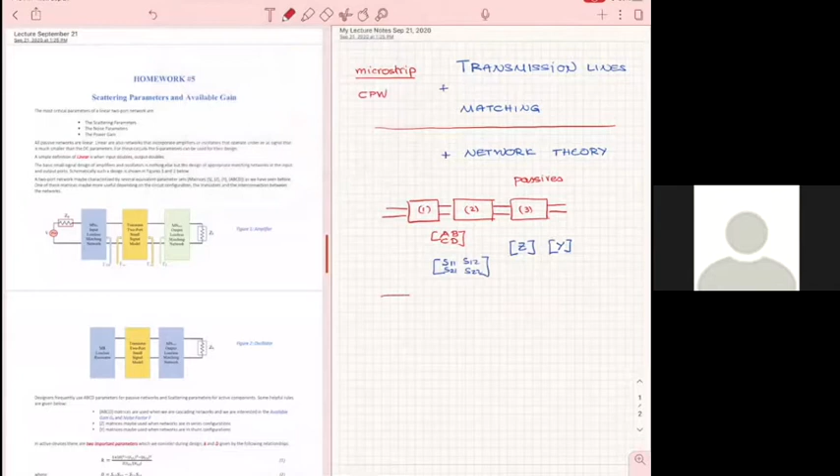Now, after that, that was important to introduce, we went back after we introduced network theory, and then we tried to talk a little bit about resonators again. And resonators, RLC, is a good thing to review. Why? Because anything you do using sections of lines or using inductors and capacitors eventually will resonate.

Sometimes you don't want to have a capacitor in a circuit, but the capacitor presents itself because of parasitics. And so we did the resonator so we understand what happens when a circuit resonates.

We started with RLC, and as we go down, you will see that any matching network will resonate, and will have the best performance at the design frequency where you want to be. But somehow later, at some point, at resonance, that system is going to change its performance substantially.

When you have an LC, the most fundamental resonator, what happens at resonance? If below resonance it looks like a C, above resonance it's going to look like an L. If below resonance it looks like an L, above resonance it's going to look like a C. So you have to stay away from these resonant frequencies to have a true representation of capacitances or inductances wherever you want to have them. Otherwise, if you hit the resonance of any of those, then practically your matching network has been destroyed.

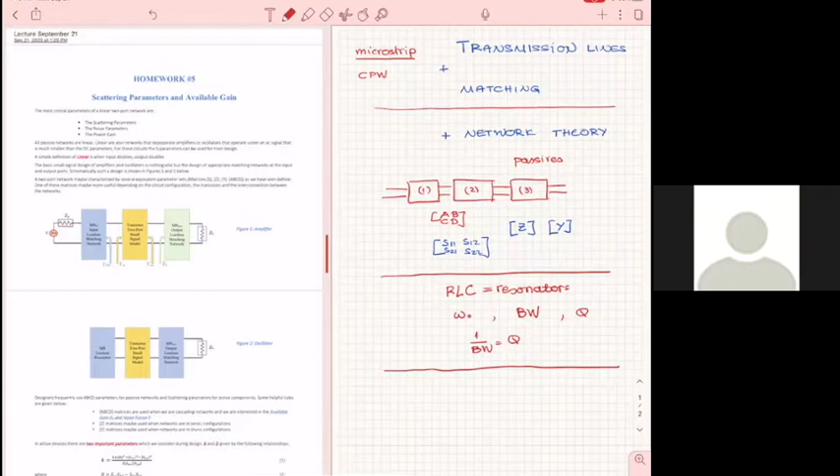Now that we have the network theory in place, remember the resonators, we introduced bandwidth and Q. We have the transmission lines and the matching circuits. Now we have enough in our toolbox to start thinking about something of higher complexity, always thinking about components in our receiver.

And that's why it was important to introduce the receiver concepts early, so you have a sense of why we are looking at filters, as we will do next. Why are we looking at amplifiers? Why are we looking at mixers? If we did not have an introduction to those systems, then I will go from one to another, and you will have no understanding of why those three are so important.

So of course, filters, amplifiers, mixers. Now, these are fundamental. Without any of the three, you will not be able to do a receiver.

Now, are those three the only ones that are required? Of course not. You will have local oscillators as a second level, but I will assume that the local oscillator can be any other generator. Of course, you're going to have the matching networks, which are embedded up here.

So how are you going to connect one to the other? Through matching networks. And then, of course, as I said, you have the LO, which we are not going to cover in this class, you will have the analog to digital converters, you're going to have digital to analog converters, you may have couplers, you may have all kinds of different things, which we are not going to cover in this class.

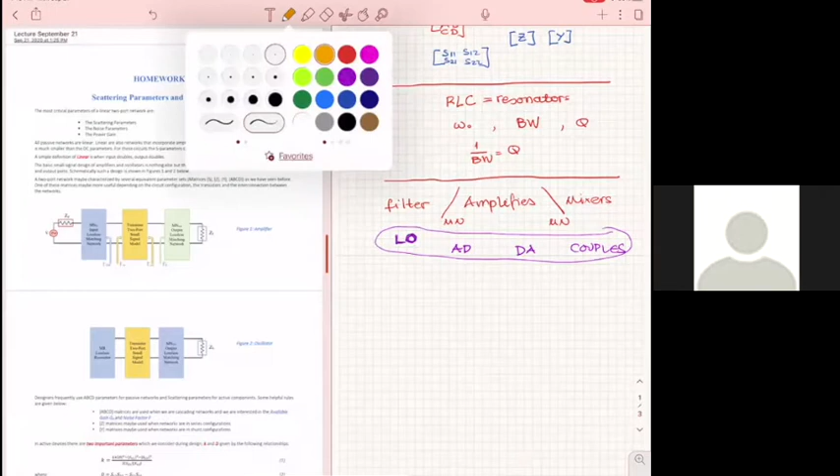And passives, usually when people talk about passives in circuit design, what they mean first of all is resistors, inductors, capacitors, number one. And then at the higher level, of course, matching networks.

Now, what we've seen, even through our homework, is that both inductors and capacitors are not like the LCs of the low frequency applications that we've seen there as fixed components. The passives in high frequencies, because they are made out of three-dimensional geometries, have resonances.

So both resistors, we did not do the resistors, we'll find a way to do them later as an example. Both resistors, inductors, and capacitors, as you have seen, have a lot of parasitics. So you create an inductor, but the parasitics introduce capacitance. You create a capacitor, but the parasitics introduce more capacitances and inductances. So eventually, all of these passives resonate.

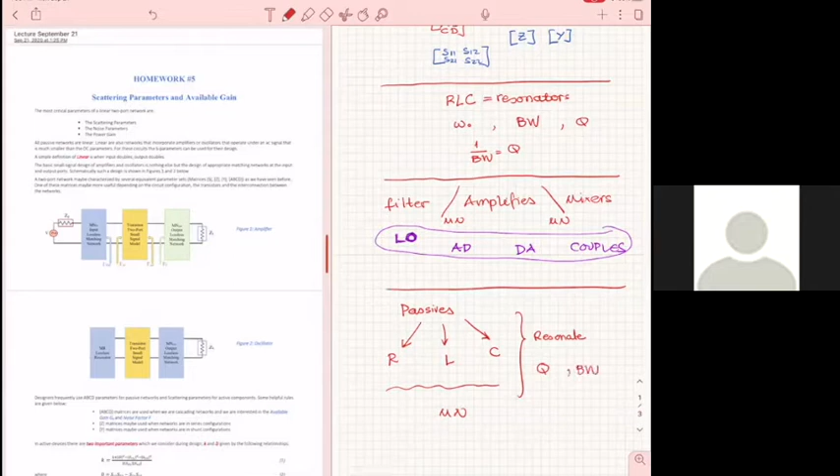That's why it is important to understand the Q and the bandwidth. Why is that important to know both? Because if you have a system made of components, your matching networks or other passives that you need will be part of those, and any Q and bandwidth here in a cascade will impact the Q and the bandwidth of the whole system.

So if you start designing without having an understanding of the importance of those, then your system, if you design them individually and put them together, the system is not going to work.

So as we do everything in a high frequency amplifier, first of all, there are no lumped elements the way we understand them in low frequencies. Everything is distributed because we make them using traditional fabrication methods. The resistors are distributed, the inductors, the capacitors, the higher the frequency you go, the more distributed they are. Everything is distributed, everything resonates, everything has a Q and a bandwidth.

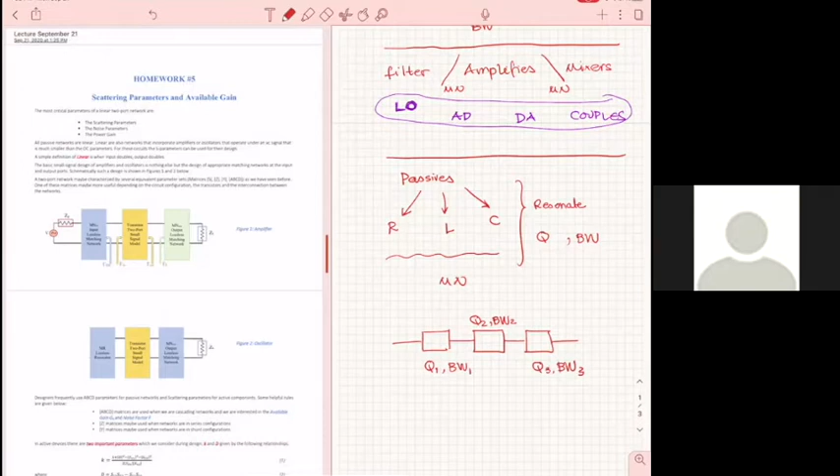And so you cannot talk about a receiver without understanding the fundamentals. Now all of this may seem to you like throwing rocks here and there in a totally random way, but it's not random. That's what I'm talking about: the system brings the pieces together.

Now with that, I would like to go to a homework that I will give you, that I have uploaded, but I will solve a similar problem, yet different, today. So before I start that, do you have any questions?

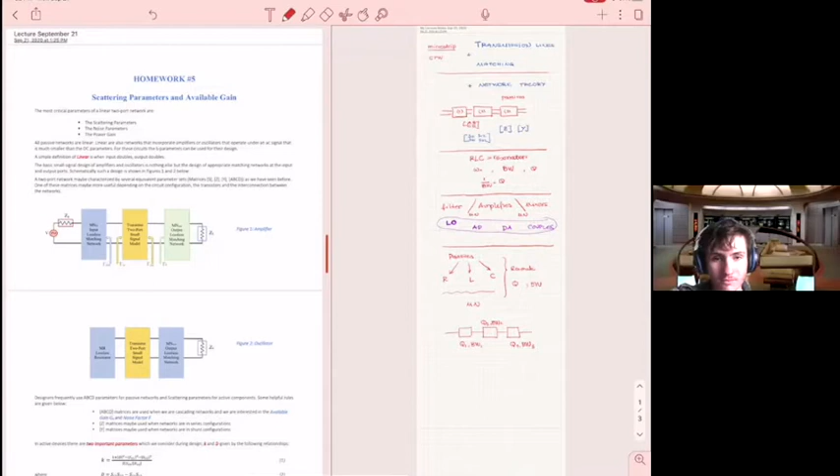Can you hear me, first of all? Yes, ma'am. Okay, because last time we had some problems. Okay, so now let's do the homework, or similar to the homework, I should say.

Okay, what you see here is something we are going to cover in detail later, but here I will give you a recipe. Still, even if it's a recipe and we have not developed that recipe, a designer is not going to just take somebody else's recipe. A designer is going to create his or her own recipe.

However, for us here, the recipe is good. And then later on we're going to go and learn how to do more complex amplifiers. But for now, we have, in fact, to create an amplifier out of a transistor chip.

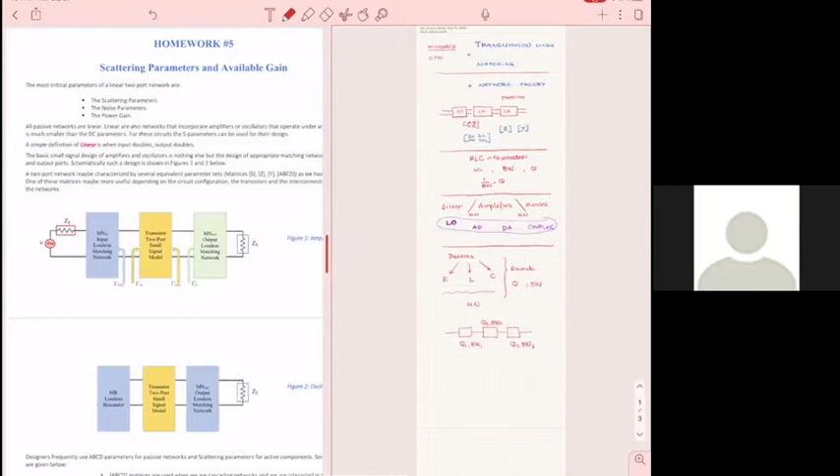Somebody gives you a transistor. You write to, say, Texas Instruments, they send you a transistor. Now this transistor is a chip, has all the characteristics as you will see later. You have all the parasitics in place, but how are you going to make that a low noise amplifier? That's the question. So the theory we are going to have says the following, look at figure 1.

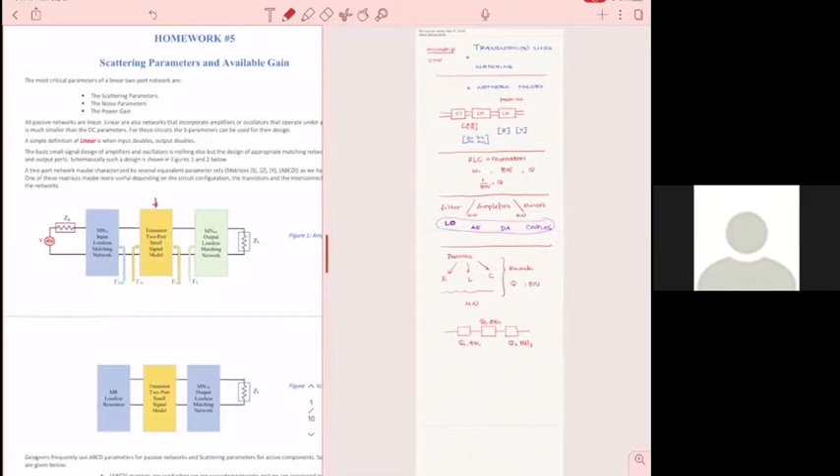To be able to do this out of a chip, this is your chip here, to be able to create an amplifier, low noise or high power, for now it's low noise the way we've done it, you will need to be able to match the amplifier on both sides. Otherwise, you're not going to get the gain you want, and you're not going to get the characteristics, stability, noise, and so forth that you want.

In this particular application, we're looking only at the gain, and we are using a recipe to do that.

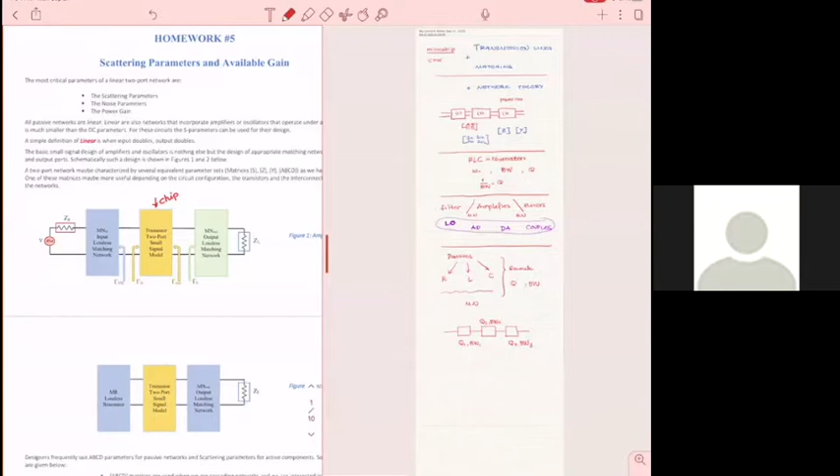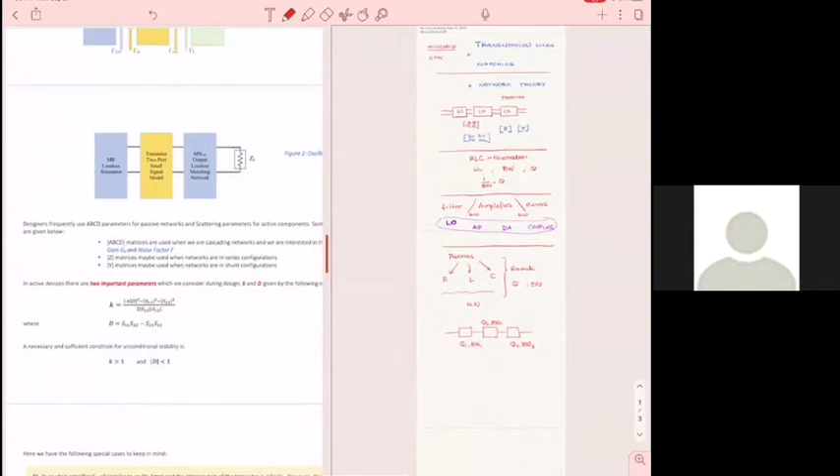Now, at this point you're going to appreciate why it is important to use the matrix terminology. Because people who develop passives, system designers, talk about passives in ABCD kind of language, because it's easy, provides the gain for them. But people who do active device characterization and who use active devices for amplifiers, they use scattering matrix terminology.

So, could we go back to the last diagram? Yes. This one. So, and then we will find out what will be in this particular case, for us to be able to design these matching networks, we'll assume that Z sub G equals Z sub L equals 50 ohms. Can you hear me? Yes, I can hear you. Yes, ma'am. Okay, okay, perfect.

And then you will assume that we are going to find gamma SM and gamma LM here. Now, if I find these two entities for you, these two complex parameters, and I ask you to design the two matching networks, will you be able to do that? Yeah, it's like identical to homework 1. You remember how we did homework 1?

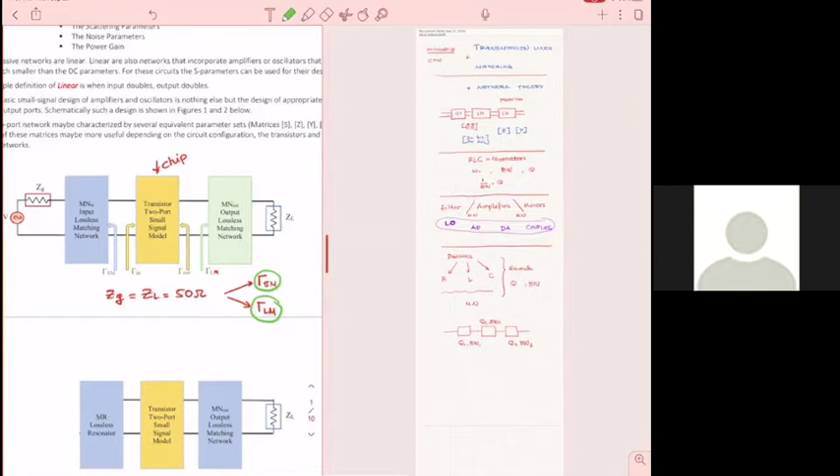So as I said before, multiple times, the only thing in creating this chip and low noise amplifier is to identify the two matching networks and to make them.

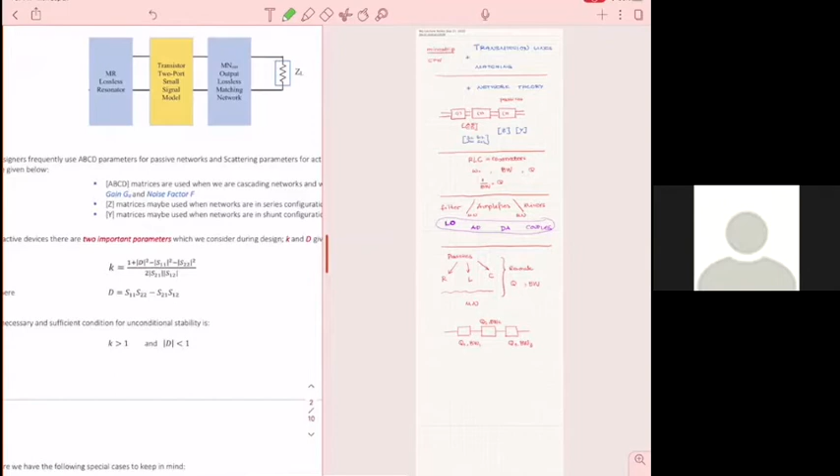Okay, what is the process to do that? First of all, active devices are given in scattering parameters. I will tell you the example that I have for this homework and the example that I will do today. The homework and the example are using different active devices.

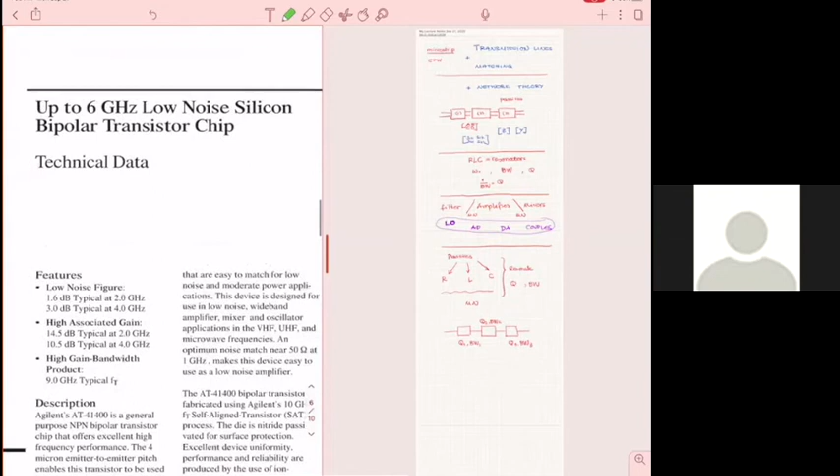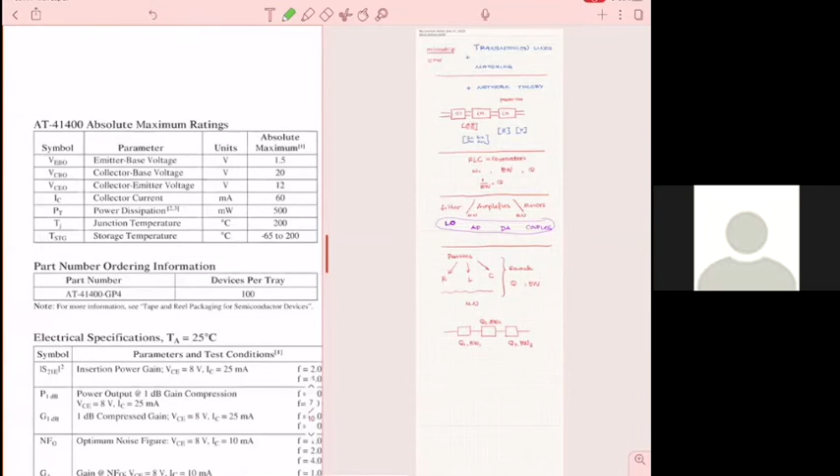For the homework, I found a bipolar transistor example that works up to 6 gigahertz, and that I got from Agilent. So here, I believe it's Agilent, yes.

So there are a lot of data, but I wanted to attract your attention to the following. Look how this chip is given to you. It has, of course, incorporated all of the chip package parasitics. So you don't have to worry about how the transistor itself has been put in its own package, because they are not given to you in an open environment—they're packaged for protection and other things.

They're given to you in terms of the scattering parameters, see? And usually, in this particular case, they will only have the scattering parameters, but you have the frequencies, and now you have here the bias conditions, all right?

Now you don't care, they just tell you—you're not gonna develop that for now. You just see the bias conditions. And then for different bias conditions, they give you different frequency ranges, or the same, depending.

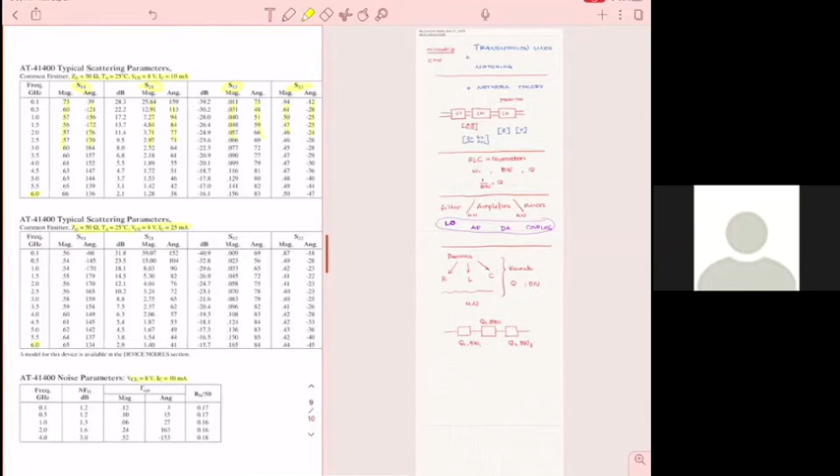Now, you then, on the basis of your operating frequency, will have to choose from these tables. You know more or less where your operating frequency is. You will have to figure out whether this device can work well. What are the first very early indications that you can easily develop your device?

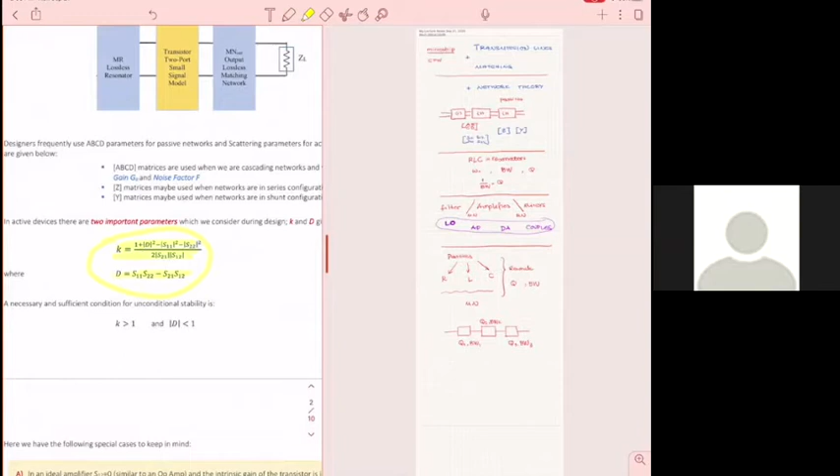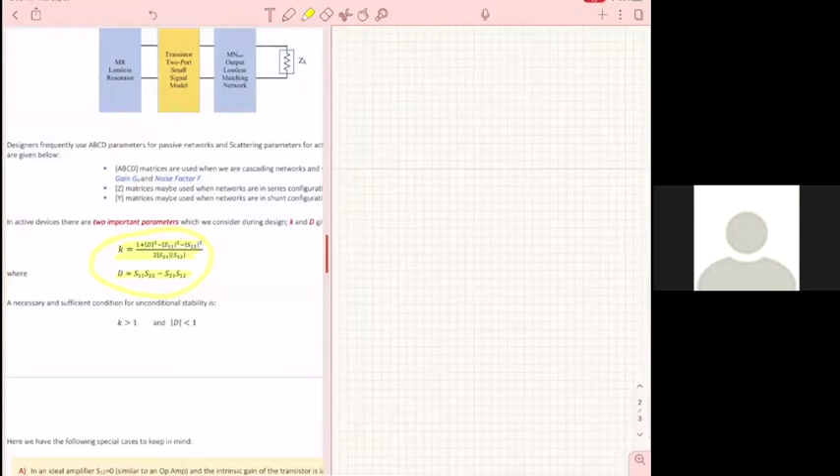There are these two parameters here: K and D. These two parameters are important because they help you understand how stable that particular transistor you will select, at that particular frequency, will be. So these two parameters are called the stability parameters, K and D.

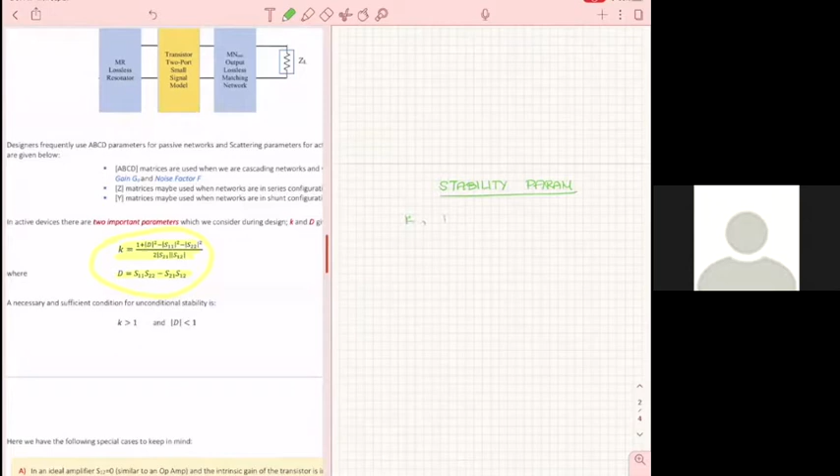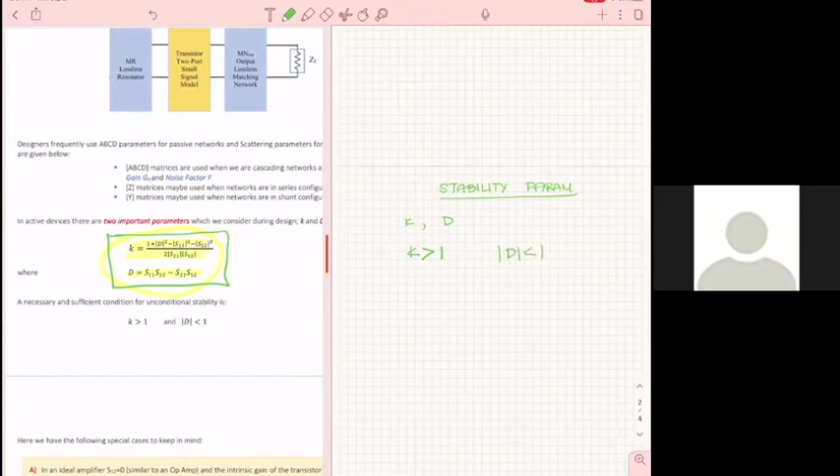The earliest test you have to do before you select your transistor and your frequency is to make sure, using these general formulas, that your K has to be above 1 and your magnitude of D below 1. And that will make your transistor unconditionally stable. You know what that means?

Probably not. It's always stable no matter what frequency, and matching—so it will be stable, it's not gonna start oscillating. That's good. Beyond that, if you are not careful with the matching, then an inappropriate matching is gonna lower your gain. That's what is gonna happen, all right?

But if you know that these two parameters apply and are in this range—one is above 1, and the magnitude of the other, D, is below 1—then you know you don't have a problem with oscillations. Now, of course, there are cases, which we will cover later, where your K is below 1, and then your transistor has to be matched carefully to be able to be stable. But you can match it, and in fact, if you want very high gain, or very high power, the best designs are transistors which are conditionally stable, all right?

We'll do that later. There are still ways to match a conditionally stable transistor to make it a good amplifier, especially for high power and high gain. However, if you want a low noise, decent gain amplifier, an unconditionally stable transistor is the best choice, all right?

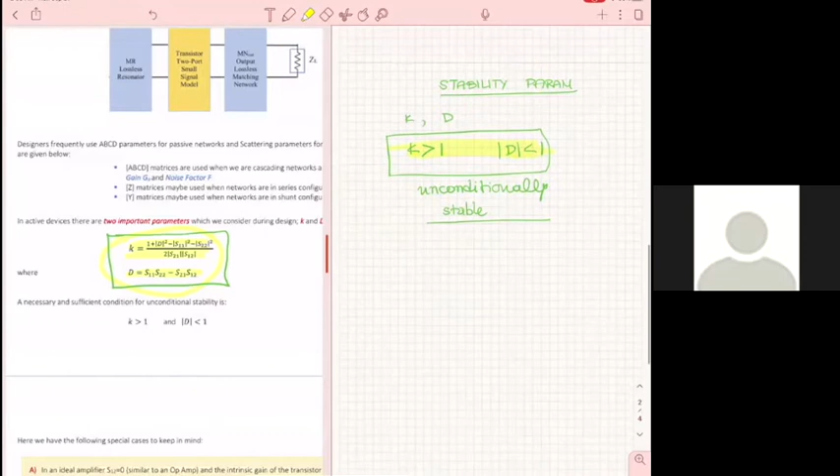So now that's where we are. Then, here is the recipe. The recipe tells you the following.

When you're ready, you can read the whole thing, it just prepares you for the recipe. But the recipe practically starts here. And that's the important piece.

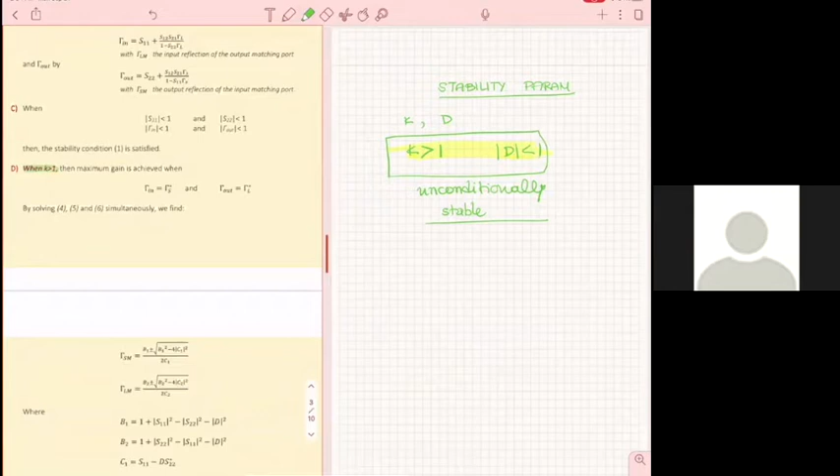Assuming that you have selected your transistor to have K above 1, usually the magnitude of D most of the time is less than 1. We don't worry, but I would always calculate it. Then the recipe tells you the following.

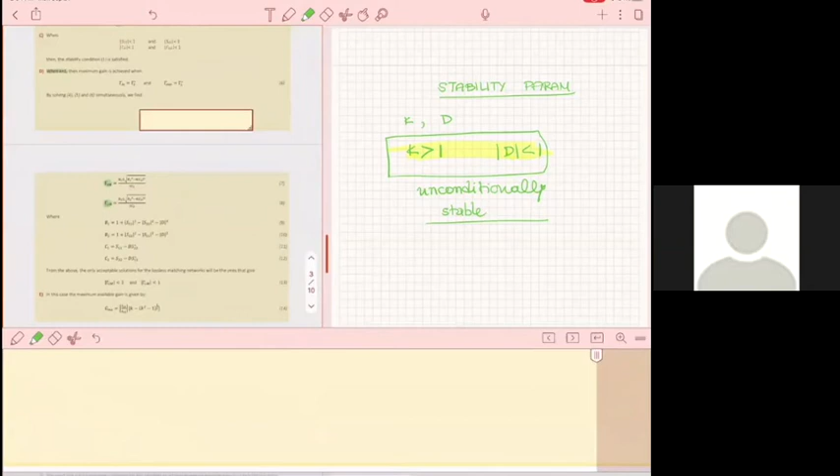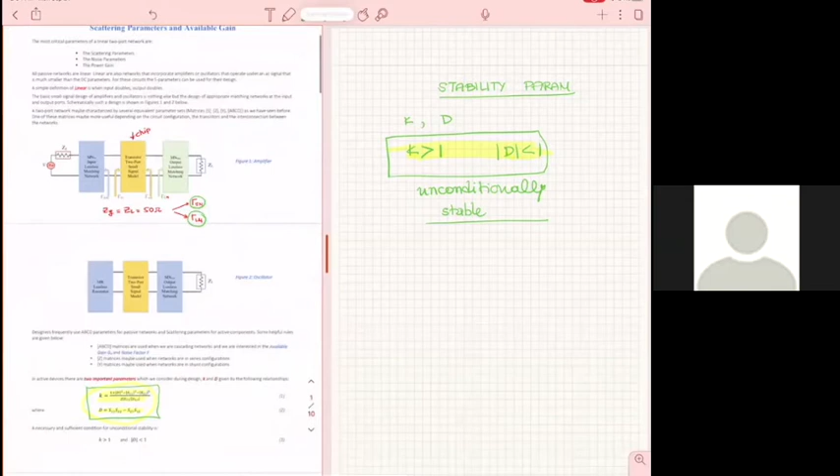If you design the two matching networks, your reflection coefficients, you remember that gamma SM that I showed you above, and the gamma LM, they are here. Gamma SM, gamma LM here. These two, if I find these two, then I have the matching networks. And these two are given by these formulas, all right?

So assuming your K is above 1, you calculate your D, and then you go upwards. You calculate your C1, C2, then your B1, B2, and then eventually you calculate this. And then when you do that, you have the two reflection coefficients, and from there you can find your matching networks. And then you know that this is going to give you the maximum available gain that you can get under low noise conditions.

And the maximum available gain, as a matter of fact, theoretically, it will have to satisfy this. And it will, if you do the matching networks correctly.

Any questions so far before I go to the example? Okay, I will assume that we don't have questions.

Sorry, real fast. You said that was for K greater than 1, right? Yes. Okay, thank you. Now, hold on, I haven't finished looking at the equation yet. Yes, okay.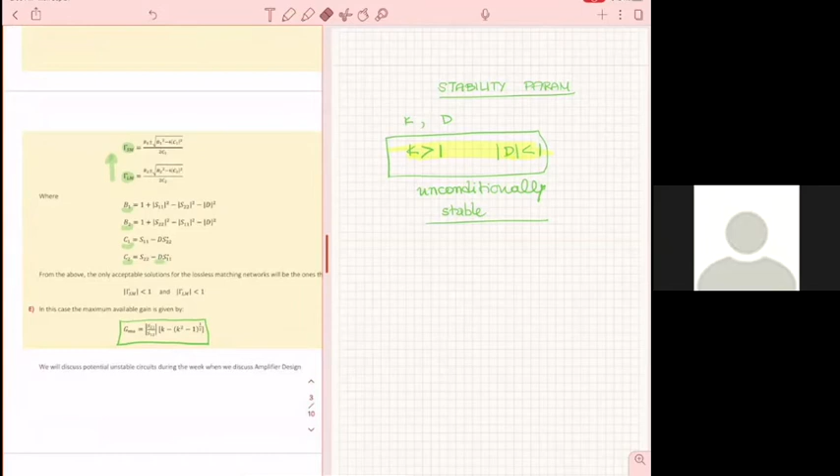Could you please zoom back? Those are also on eCampus. Had they been uploaded? Oh, that's homework 5. Yes, and this is also the theory that we are doing today. Okay, but this, all right? All right, yes, and I will, okay.

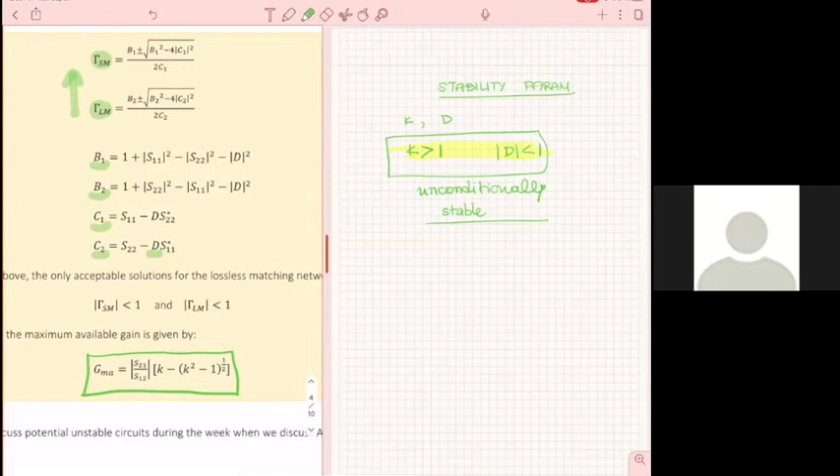You see why K has to be above 1? Because in here, there is a square root of K squared minus 1. And the available gain, of course, is in terms of power, so it's a real number. That's why K has to be above 1 to be able to do this unconditional matching.

If K is less than 1, you have to do a different approach to get the gammas. You cannot get the gamma SM and the gamma LM from these functions anymore. You have to go to the Smith chart and do some kind of trial and error, because on the Smith chart we're going to learn where the stability regions are for a potentially unstable transistor. We'll be able to draw the stable regions on the Smith chart, and we are going to find an operating point to have the transistor operate in those regions. That is what we're going to learn later, but not for now.

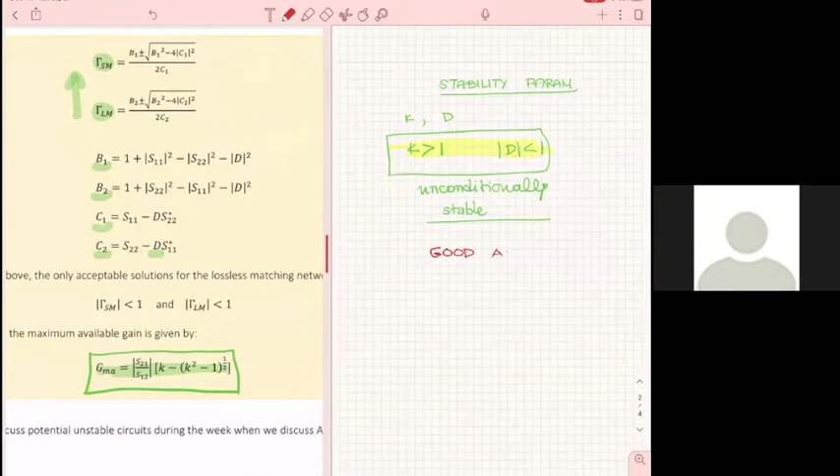This is for unconditionally stable transistors. And again, remember, this is a good approach for low noise, medium type of gain, which is in fact this G maximum available of an LNA practically, okay? This is a good approach to design an LNA. We're going to see those more, but now this is the recipe.

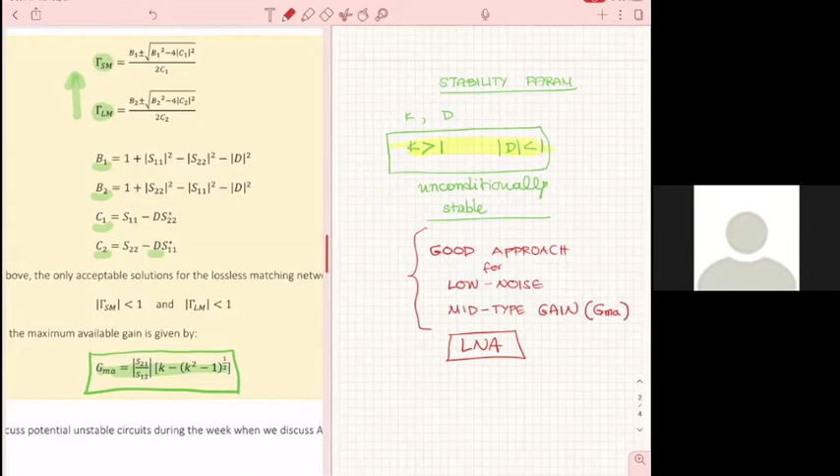I don't want you to know anything more about that, but the only thing we did from here is to find the two gammas. And from there, then you go to the design of the matching networks. Okay, so now I will do an example on the basis of that.

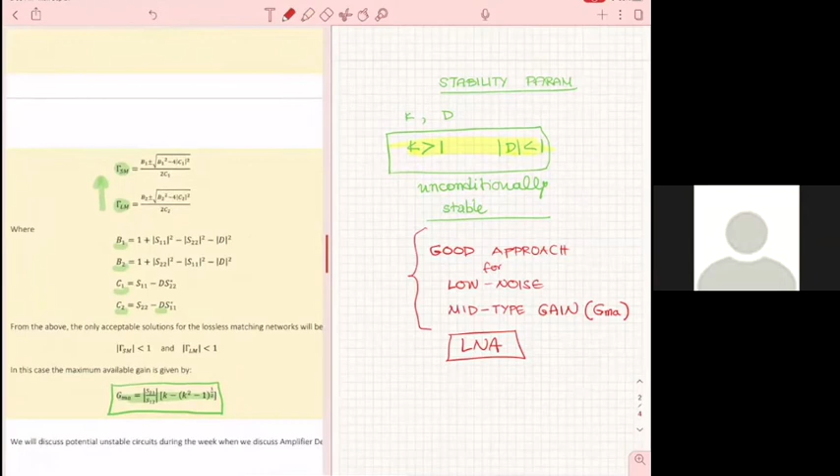Let me go back here, and I would like to show you this one. Okay, that's a different BJT. I selected that because I was able to, it's also a BJT, but it's given by NEC. It's a different one. And look at the interesting thing.

Very interesting. The transistor itself has been designed for, if you want to consider 1 gigahertz high frequency, but very low noise there. And because people will operate it around the lowest noise point, the FT is only 7 gigahertz.

You see that? You remember what we called FT? Who will tell me what FT is from what you remember from active devices? You have unity gain. Unity gain for the intrinsic device, all right? Without the package parasitics, remember that. There is another one which is called F max. What is F max?

Unity for power, but it depends on the load, correct? Exactly, and the parasitics, the package parasitics and the whole thing. Usually Fmax is lower than FT, as you can imagine. But people who are good designers try to make Fmax as close to FT as possible, though it's always lower. And yet you have to stay away from both of them.

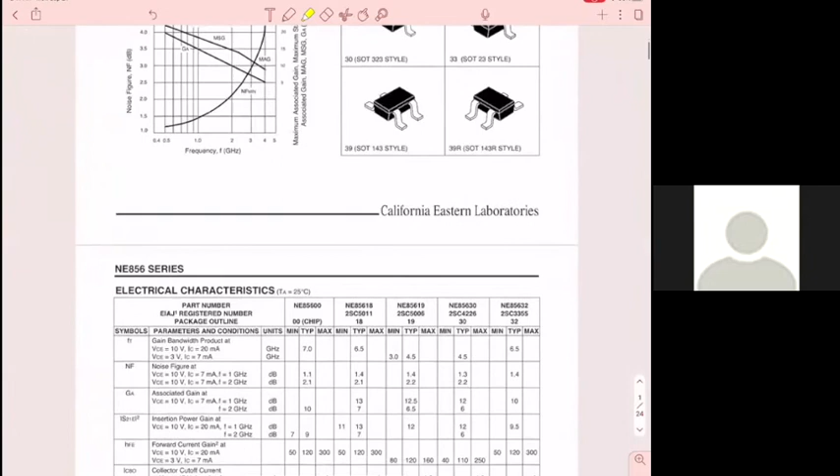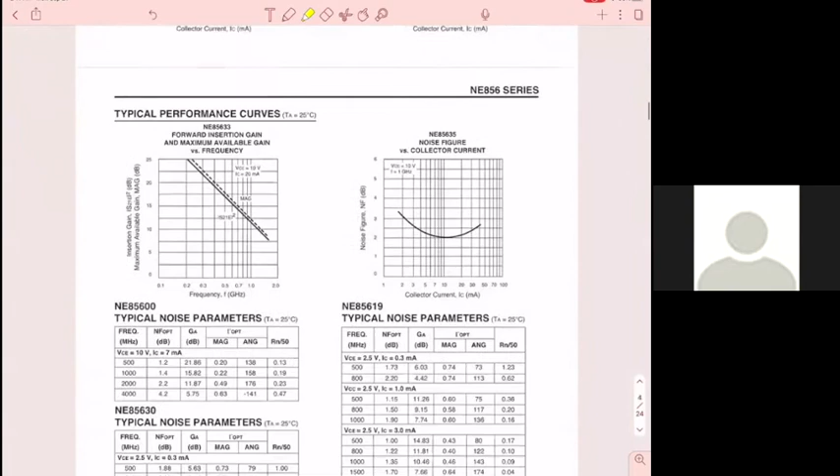In any case, this is what I found. I liked it because there are a lot of data sheets available from industry, and this one I liked. I skipped all of this and went directly to the scattering parameters. Here are my scattering parameters.

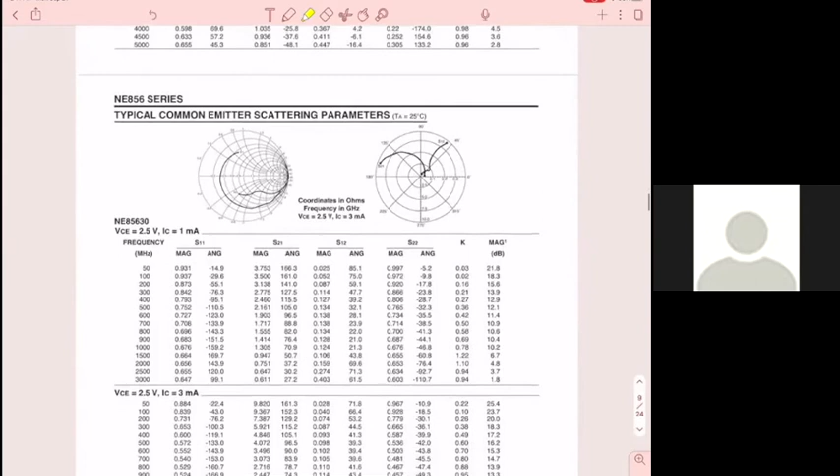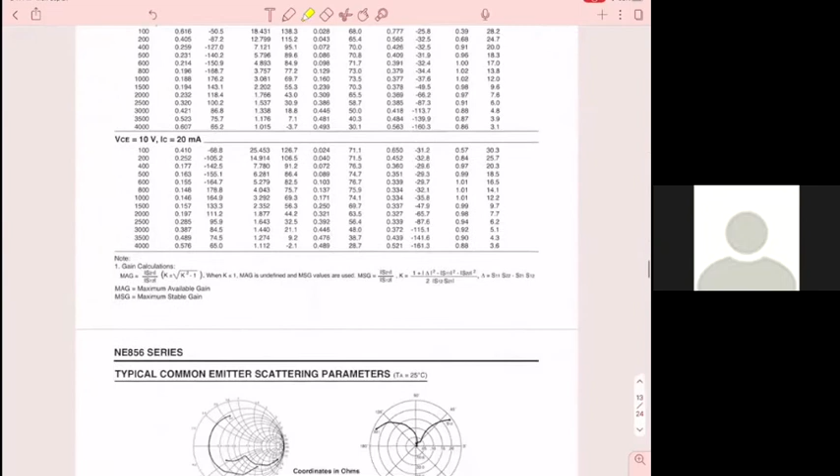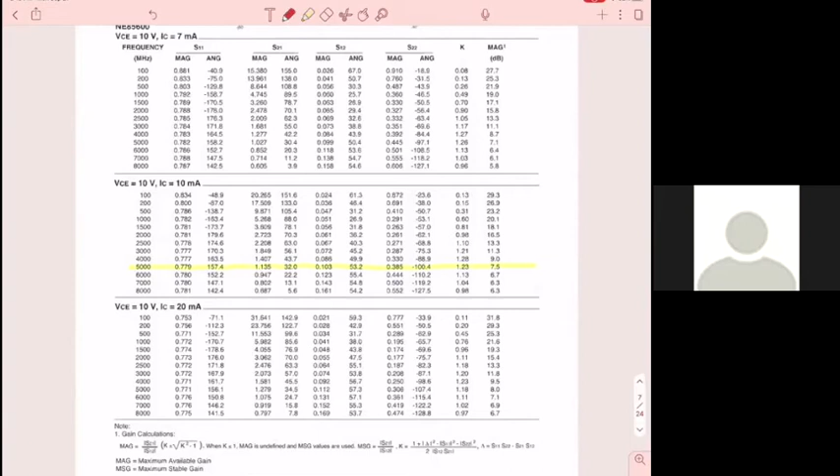Here, I'll show you which ones I selected. The interesting thing is, you can ask me why I selected that. I selected it at 5, close to my frequency - this particular one has a higher frequency design, close to 5 gigahertz. But look at what else I paid attention to: the nice thing is it has K also calculated, and has the maximum available gain calculated.

So if you do it correctly, I'm going to get this high of a K. K will be 1.23. And then I will have a nice maximum available gain of 7.5 dB, which is nice since I'll have relatively low noise. Now the noise is not calculated here, but you can calculate the noise - we will see how to calculate the noise later. All right, so I selected those.

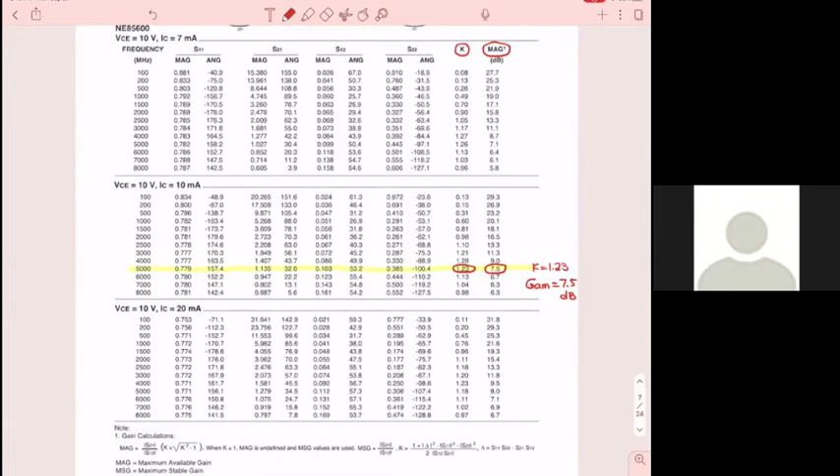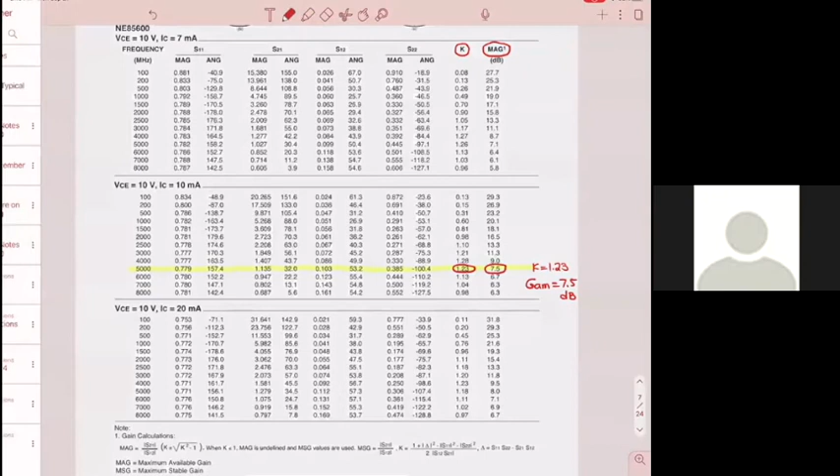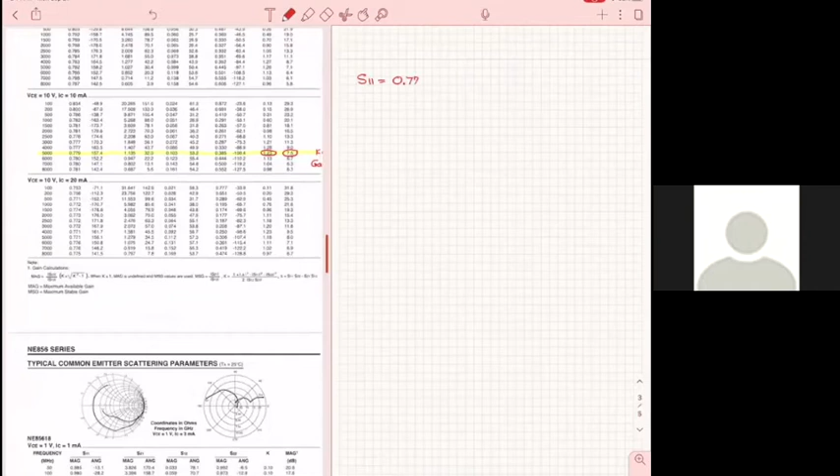So what do you do in a case like that? Let me get my lecture notes here on the right. So now I'm going here. What I did is I wrote down what I have. My S11 is practically 0.779, 157.4. My S21, see, is S21 first.

S21 is 1.135, and then it's 32. S12, which comes next, is point...

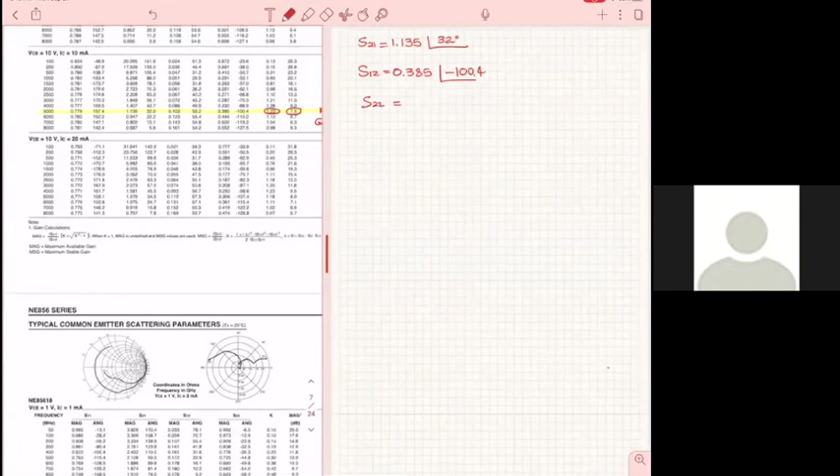Is this an unequal sign, not equal sign for S21? I'm sorry, it was like a thing that was generated from that. 0.385, minus 100.4, and then S22... Well, let me see, no, it's S11, S21, S12. Yeah, this is S22. Okay, S22, and then S12 is here.

103. 53.2. Okay, then...

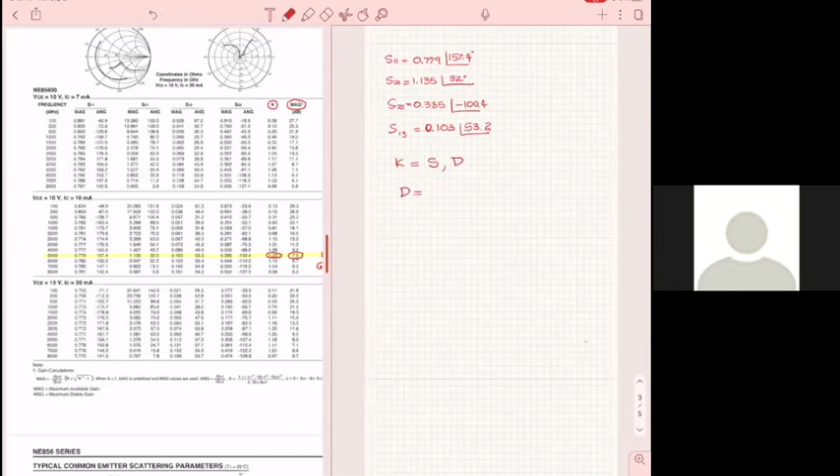What you do, what I would do myself, is confirm your K from the K formulas you have seen. K, according to the formula I showed you before, is a function of the S parameters plus D. So you have to calculate D, which is S11 S22 minus S12 S21. And then from there, go calculate, and that has to be less than 1. Then you have to confirm that your K, if available from the manufacturer, matches this value. K is 1.23, 1.23. Then after this, you calculate the formulas.

You calculate C1, which is practically plugging in the values for S11 minus D, S22 complex conjugate. In this particular case, I found my D to be 0.435. So D was 0.435 for me. I made some rounding to make those calculations easier. And then you find C1 and C2.

From C1 and C2, you go and calculate B1 and B2, and B1 and B2 are real numbers. So if I were to go back for a moment and look at this, all right? So what you're going to have is D, as you saw before - it's a complex number. C1 and C2 are complex numbers, but B1 and B2 are real numbers, as you can see.

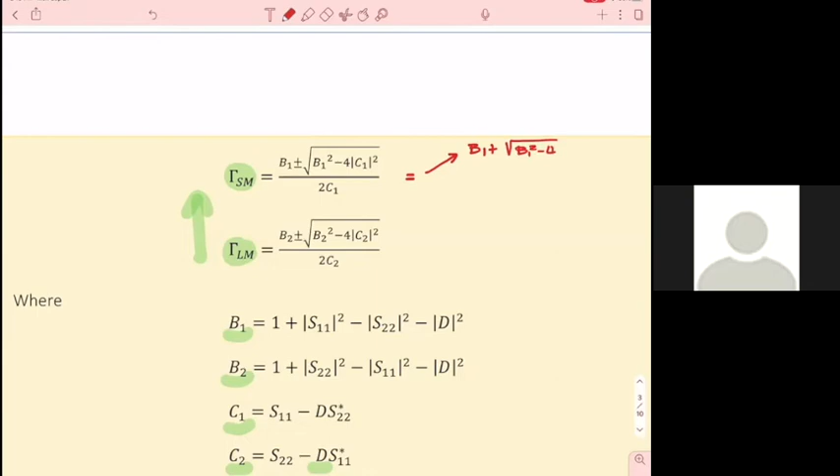And then from B1 and B2, you go into the expressions for gamma SM and gamma LM. And here you will see the following: the numerator is real and has two possible values, B1 plus or minus the square root of B1 squared minus 4 C1 squared, divided by 2 C1. So your gamma SM has a phase which is the negative of the phase of C1.

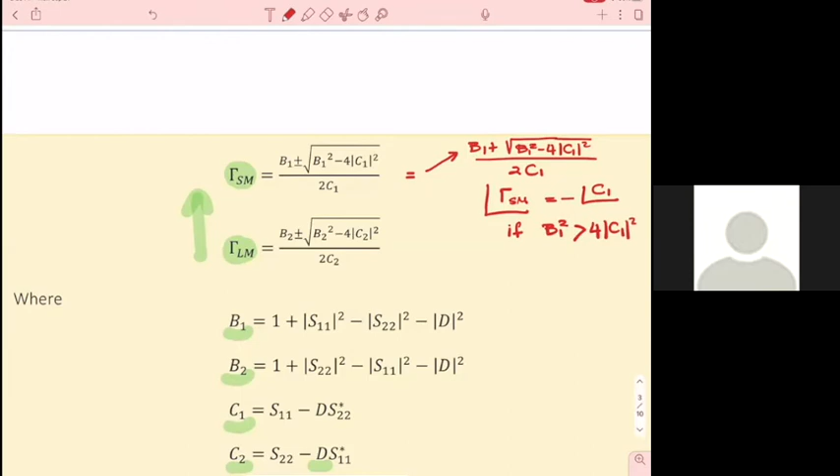Unless, that is true if B1 squared is larger than 4 C1 squared, okay? However, if B1 squared is less than 4 C1 squared, then your numerator becomes B1 plus J of this.

So there is also a complex number in the numerator. In this particular case below, your phase for gamma SM is going to be different than the phase of C1, because you're going to have a J in the numerator, and C1 is also a complex number.

Now, the other thing you have to pay attention to is that in addition to plus, I will have a minus. Practically the minus is going to give me, in the second case, a different result. And in the first case, it's going to give a different number in front, on top, if they're both real. But you are going to have two solutions.

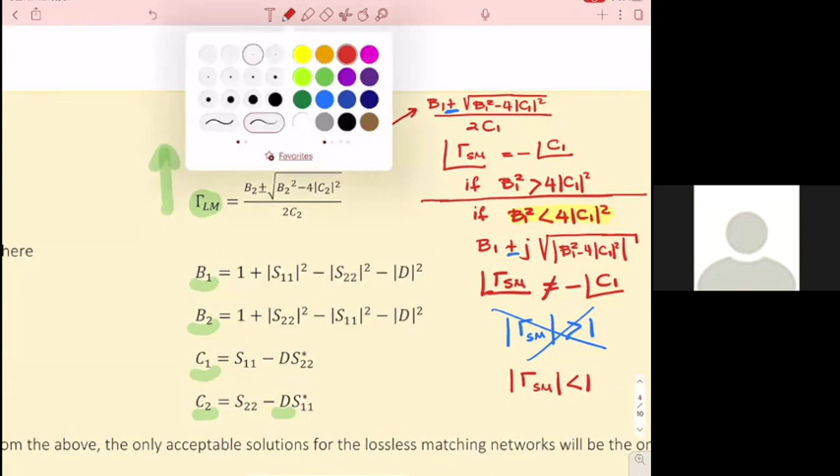So it's only the solutions from here that you're going to select - only the solutions that give gamma SM less than 1 and gamma LM less than 1. That's where you're going to stop after you calculate.

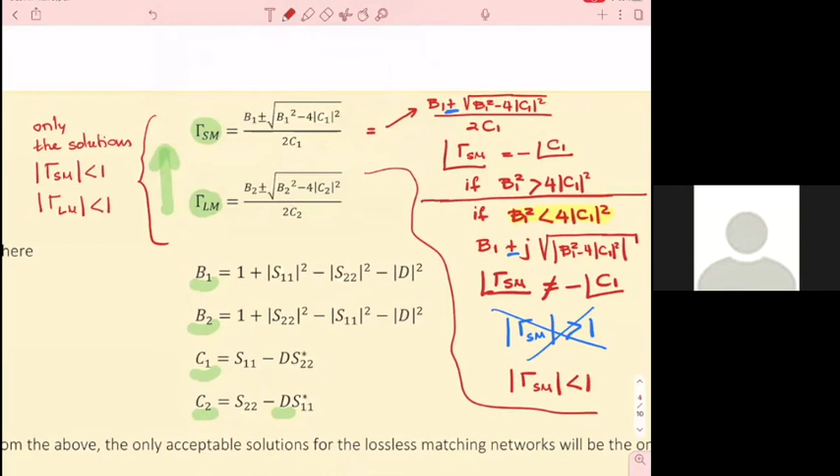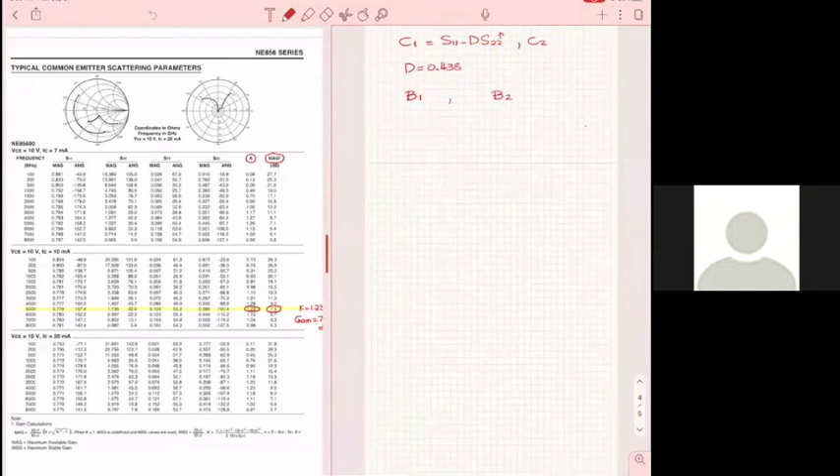Now let's go to my other notes. After you have calculated your gamma SM and your gamma LM in magnitude and phase, they're going to look like this: magnitude, which is going to be less than 1, e to the j phi SM, and magnitude e to the j phi LM. And of course, in your solutions, I will again remind you, this will have to be less than 1.

Now, it is true that all of your solutions could be less than 1, which means all of the solutions are possible. It's not always true that one of the magnitudes in one of those solutions is going to be higher than 1. But if it's higher, you dismiss it. If it's not higher, you keep all of them, and all of them will give you different matching networks that can do the job equally well in terms of matching the amplifier.

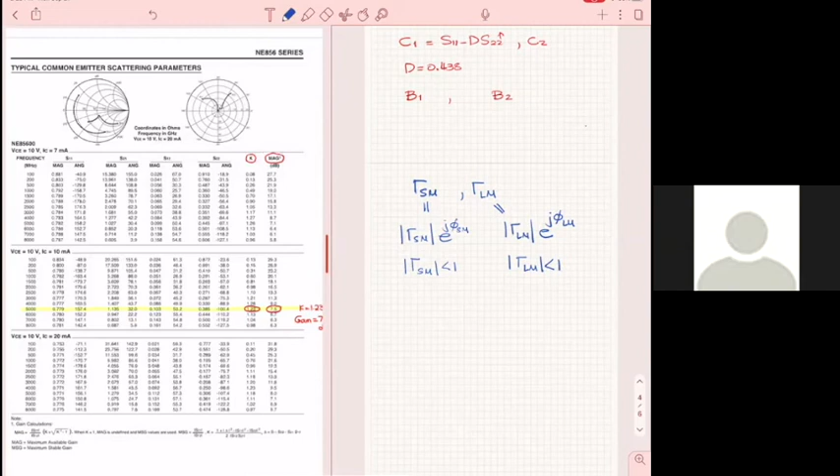Now, from all of those, some will be better than others when you start thinking about the Q, the resonant frequency, or the bandwidth of your matching network. Because so far, so good, you've done this. Now the next challenge is to find the matching networks.

In this homework, or for our projects - the projects are open-ended, so I'm not going to tell you where to stop. In the homework, obviously, I'm not interested in you going for every solution you find. Just pick one of your gammas and try to realize that. I don't want you to, if you find 2 solutions for one and 2 solutions for the other, go create 4 possible combinations. No, select.

So you're going to select one solution for gamma SM, and you're going to select also one solution for gamma LM, and you will try to develop those matching networks. In reality, though, if I am an engineer and I have to provide the best possible amplifier, that means my matching networks should not take away any of the power.

Because if my matching networks have long lines and they're too big, then I will have losses - metal losses, dielectric losses - plus long lines will have inductances. Narrow lines will give me high metal losses, as we discussed. So there are all of these other considerations that come into play that eventually will make, out of these possible solutions, only one to be the best.

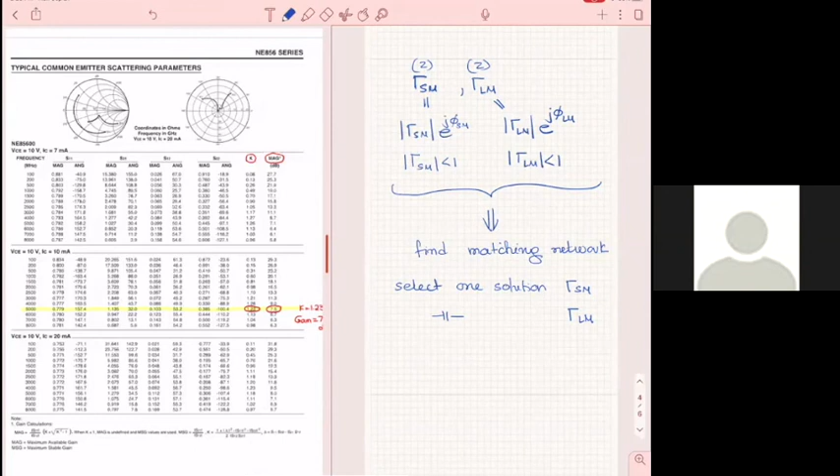For today, I want you to remember what I told you very early about the things that are important to remember: transmission lines and matching networks, network theory, ABCD and scattering matrices, and resonators. Very important components that we need to put together. This is the first time we try to integrate those concepts in ways that are also related to our systems.

In any case, with that, I would like to ask if you have any specific questions. If you do, please join me during the office hours. Let me see if there are any questions. I have a question. Yes.

The syllabus says that we're having our midterm Wednesday, September 30th. I believe that's Wednesday of next week. Are you planning on doing that? Yes, and it's going to be on the material that we are going to cover.

So of course, it's going to be something you're going to have for 50 minutes. It's going to be like a take-home kind of exam. I will make it available to you at the beginning of the hour, and you're going to have to submit it at the end of the hour. It's going to be on the material we have covered so far.